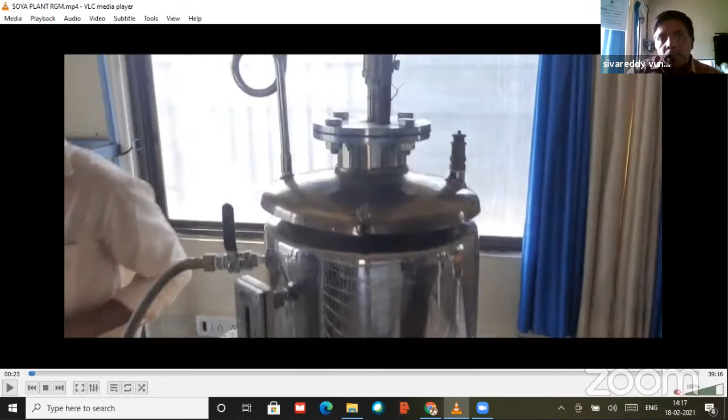After soaking, we clean the seed and separate the total skin. That skin we give as feed to the animals. The soaking is also done in the absence of oxygen - whatever oxygen is available in the water is all that's present.

General, not exposed to the general air - that is our target. At present, we don't have any vacuum chamber, so we are fully filling the chamber with water, keeping it in the absence of air while soaking. After soaking, we clean the seed and remove the skin.

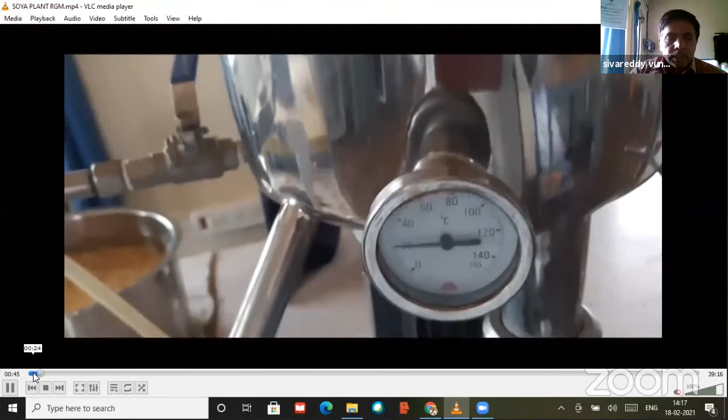Next, this is the boiler, a small boiler, let me show you. At present, the boiler is already at 1.5 bar pressure and steam is ready to supply. This boiler's capacity is 4 kgs per hour steam generation, which is more than sufficient for our batch.

This is the grinder cum cooking unit. Whatever seed we soaked, we first pour into the grinder. You can see this is the grinder unit. About 90% of the skin is removed here.

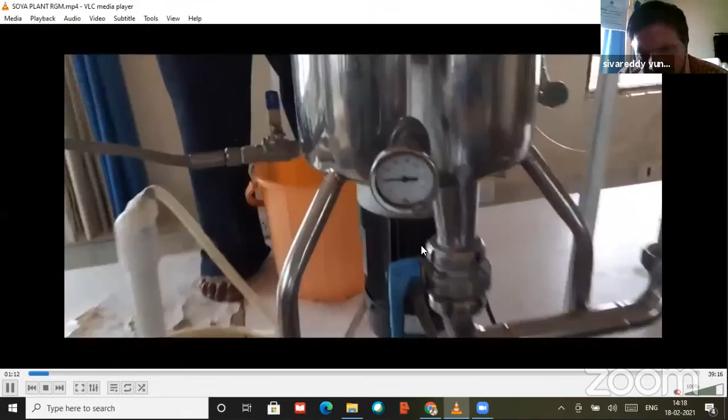In the grinder, at present the temperature is ambient only, around 20 degrees. The pressure is also normal, zero pressure - meaning ambient pressure only, with no pressure rise.

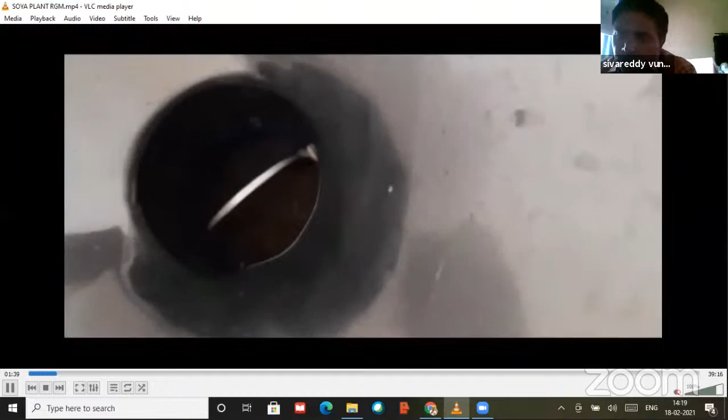I think 12 liters of water we are adding per batch. Each batch contains 2 kgs of seed. For that, we add 12 liters of water after soaking the seed. The seed will absorb 4 to 5 liters of water during the entire night's soaking. Then we close the pouring valve.

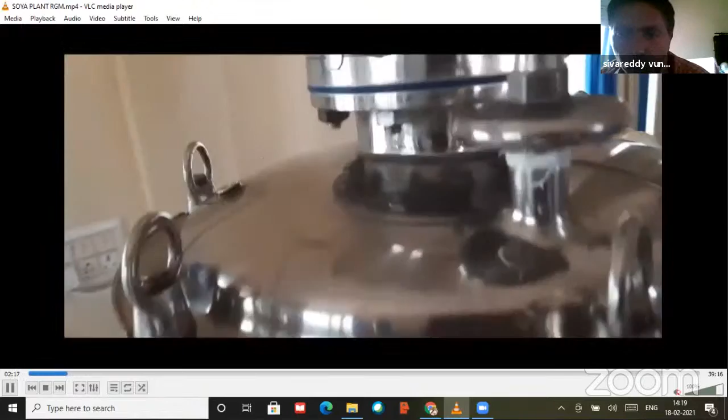Now we have started supplying steam. Why? Because in this grinder we are doing cooking and grinding simultaneously. Cooking happens up to 1.5 bar pressure and 110 degrees temperature. Grinding generally takes 5 to 6 minutes depending on the soaking of the seed, but effective soaking of the seed takes only 3 to 4 minutes.

See, from the boiler now - it's generally gas fired only. This is a small vessel, you can see.

Now, once we opened the valve, earlier there was 1.5 bar pressure. Now it's reduced to 1 bar because our helper stopped the gas supply. Because of that, whatever steam was generated went into the grinder, so pressure drop takes place in the boiler.

Again, we are giving fire, so the boiler pressure will increase. Generally, we maintain boiler pressure at 1.5 to 2 bar, and grinder pressure at 1 to 1.5 bar. Then only supply of steam from the boiler to the grinder will take place - otherwise steam from the grinder will enter into the boiler.

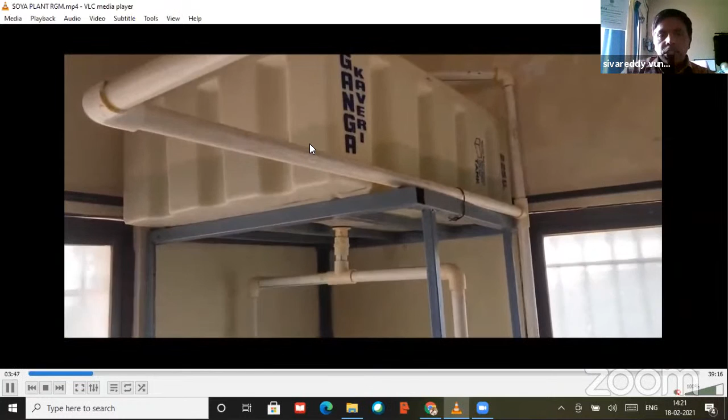We are maintaining it. This is the RO water collection tank only. Why? Because we have not placed an RO processing plant here. The RO processing plant for the institute is one centralized processing plant with 2000 liters per hour capacity. From there we directly get the RO water.

Because if we use RO water, the softness of the milk will increase. Otherwise the milk remains in a hard condition. This is a plant - it's our institute.

Why is my building away from our regular class activity work? Because we are doing processing work and some water smells come out, so it's not acceptable within the education institute. That's why a separate building is available in our institute - the R&D building.

This is the boiler. Now they provided fire. Let's see. This is the water level meter - checking how much water is there.

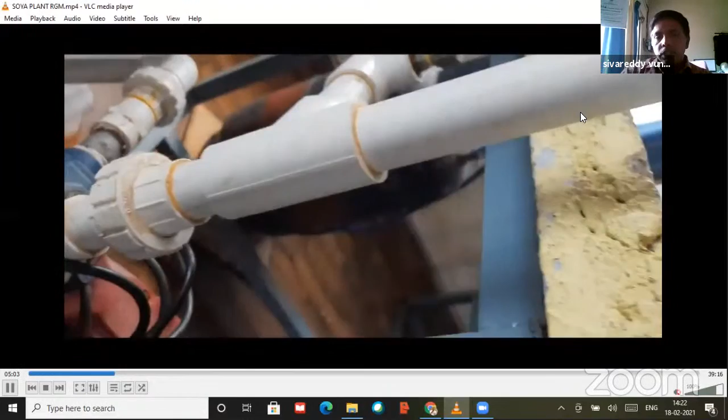Through a pump only, we supply this RO water into the boiler. If the water is reducing, we supply RO water through the circulating pump.

Now you see the pressure - earlier it was 1 bar. After giving fire, the pressure is rising. After reaching 1.5 bar pressure, we again start supplying steam to the grinder.

Yes, it has crossed 1.5 bar. It is reaching around 2 bar pressure.

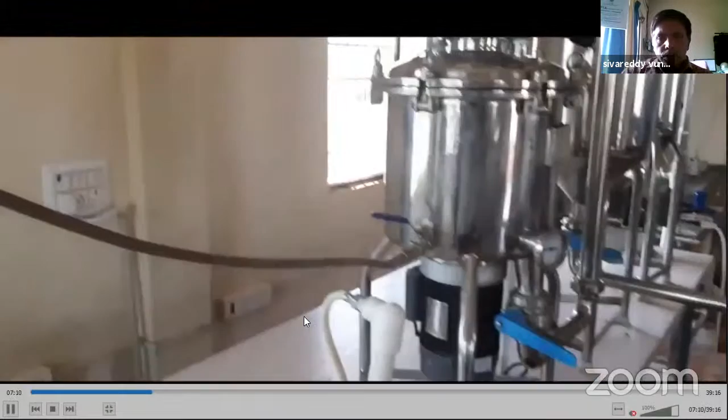Now the valve is slightly opened. You can see temperatures have now started rising - earlier it was 20 degrees. The pressure is at normal only. And we started the grinder.

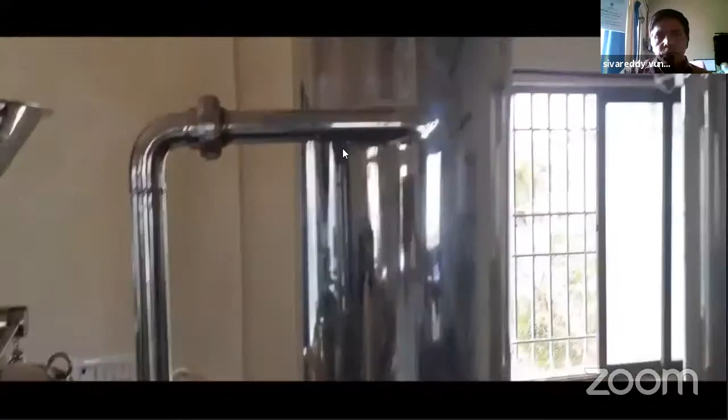This is the grinding unit. Carbon blades are used in this grinder. After this is a vacuum chamber, a suction chamber - there are two suction chambers.

Whatever cooked soya seed paste is there, we directly suck it into the second chamber. We placed two suction chambers because if something gets missed, it will not enter into the vacuum pump - one more suction chamber is connected after that. For this suction chamber, we have connected one vacuum pump.

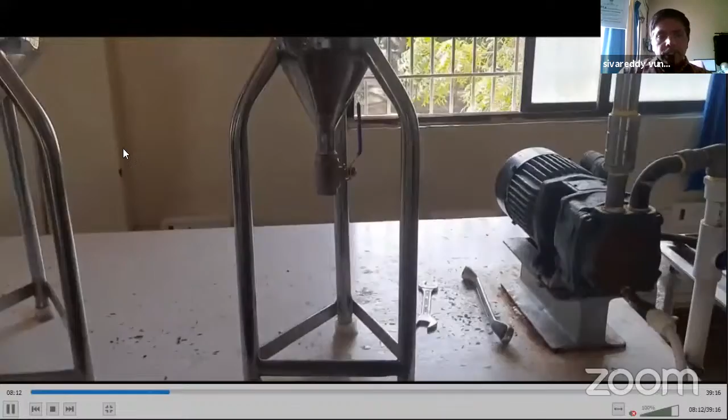By this vacuum suction operation, the main advantage is that we are sucking out water while cooking and boiling. Waterness is the major drawback of soya milk, so we are capable of eliminating this waterness.

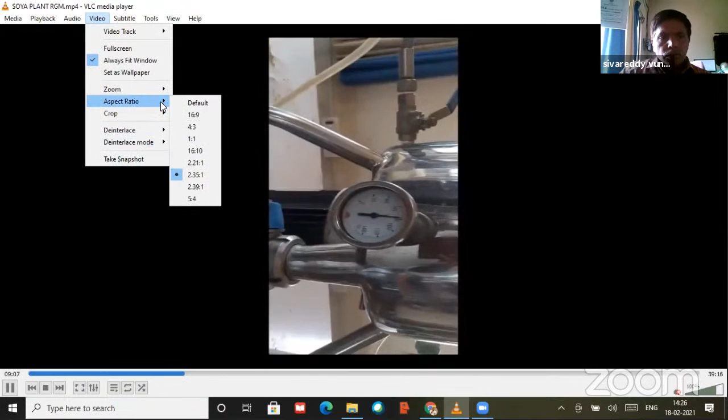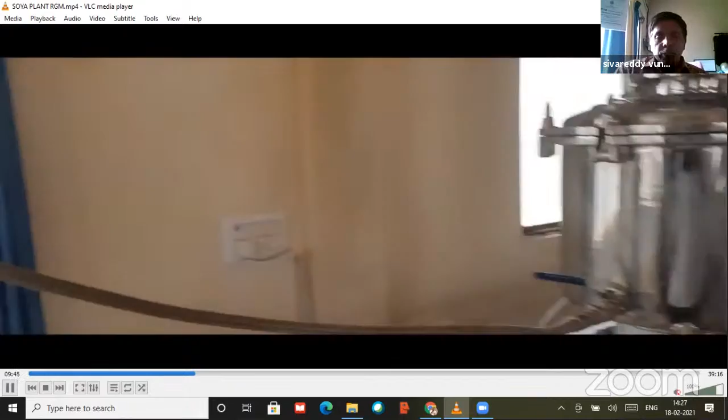Yes, you see the pressure is around 2 bar. So I want to remove the water after cooking time. More by steaming operation, more water is coming. That water, first initially, we are sucking by the vacuum pump. Entire water we are sucking by vacuum pump. That water is absorbed by the vacuum pump circulating water. So by the suction we get two advantages.

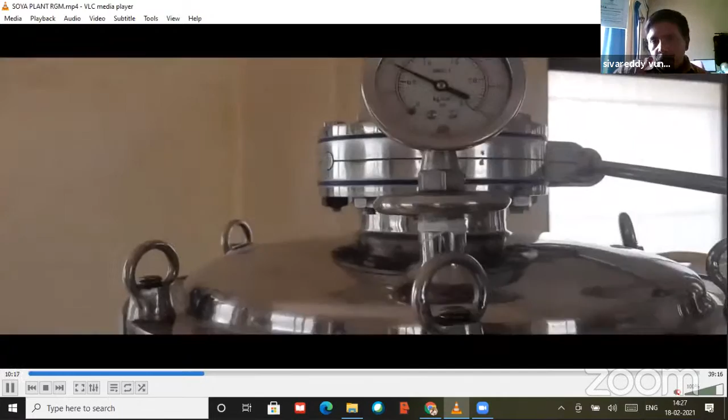One is from the grinder, we don't want to open the grinder. Entire paste, whatever the soya paste is there, total liquid we can suck to the second chamber, the preparation chamber. One advantage is no manual intervention. Second advantage, we are capable to suck the water also. 90% of water will be absorbed by the vacuum suction. That's why we gave two chambers.

At the time of suction, some liquid separately is coming, meaning it will enter into the second chamber also, because our vacuum pump capacity is 1 HP. Generally that is sufficient for 4 kg loading capacity, but at present we are doing only 2 kg loading capacity per batch. For that only, we connected the second chamber also. So by the suction operation, we are removing the water.

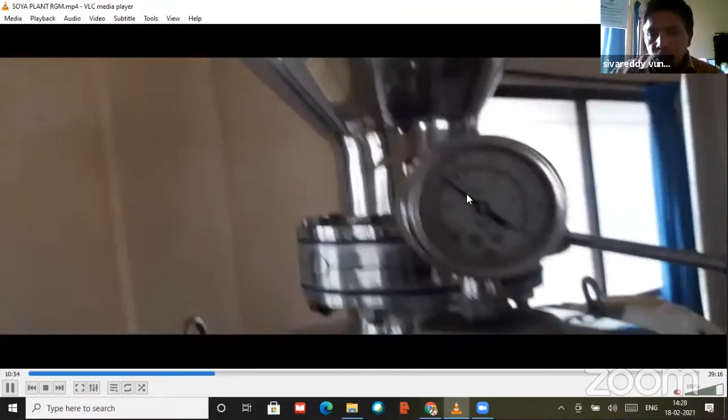That is the main advantage. You can see now in the grinding chamber, the pressure is rising to nearer 1 bar. Earlier it was in zero condition. Now it is coming to nearer 1 to 1.5 bar, and temperature 110 degrees. Up to 110 degrees we are cooking the soya seed. Now you see the temperature also reached 100 degrees. But for this, it will take at least 20 to 30 minutes. For reducing the time, we merged all the cut videos.

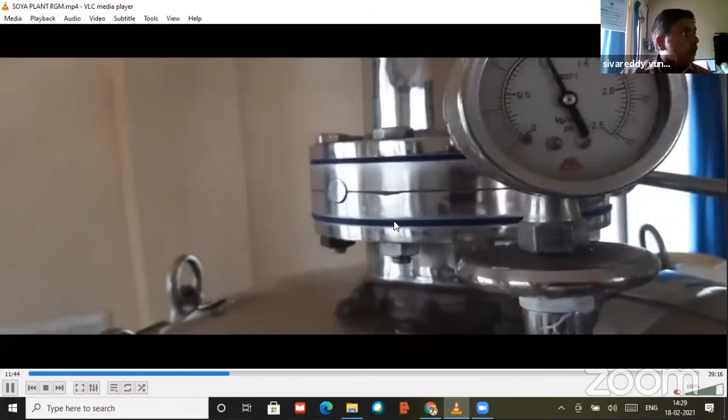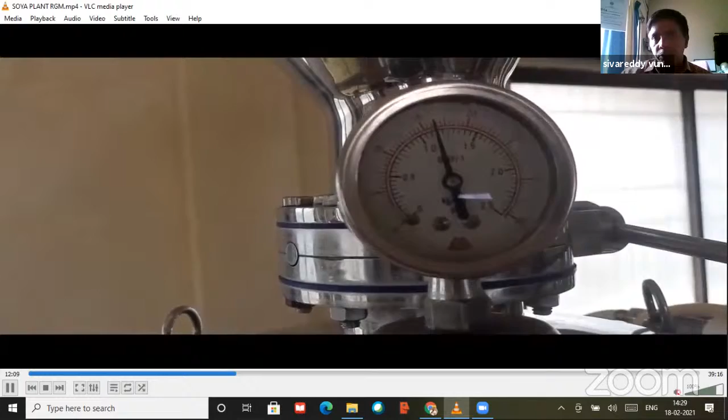Yes, almost it reached 110 degrees. If it crosses 120 degrees, again the spoilage of the flavor will take place. Less than 120 degrees only, cooking has to take place.

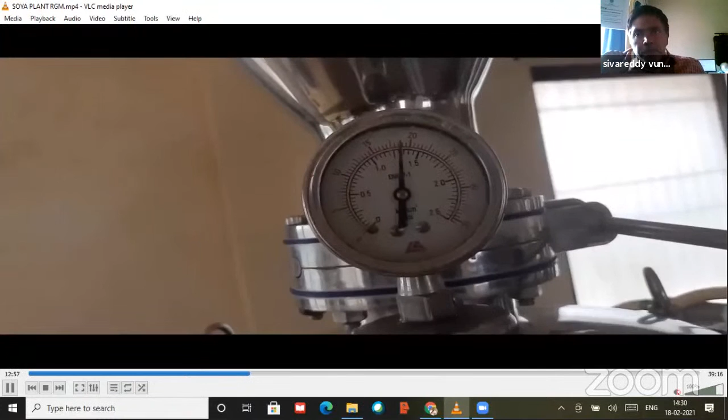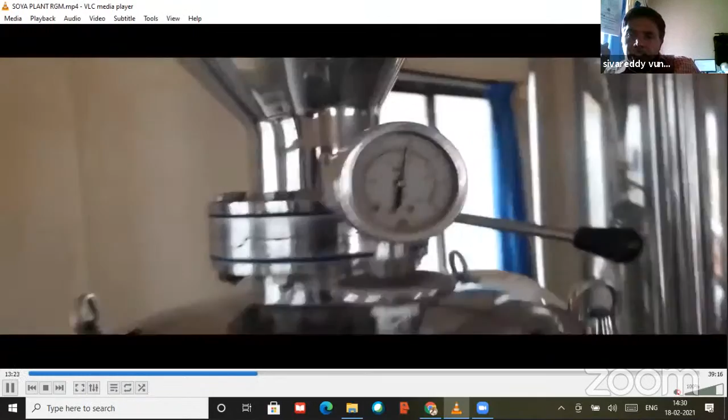And also that cooking is not by flame, that cooking is by steam. Earlier I mentioned 12 liters of water we are supplying and 4 kgs of steam. Total 16 kgs of liquid for 2 kgs of seed. 2 kgs of seed I am loading, meaning 16 kgs of liquid we are supplying. Finally we will get around 16 liters of milk, and 2 to 3 kgs of okara we will get. So for 2 kgs loaded, we get at least 14 kgs of milk. Per kg of seed we will get 7 kgs of soya milk.

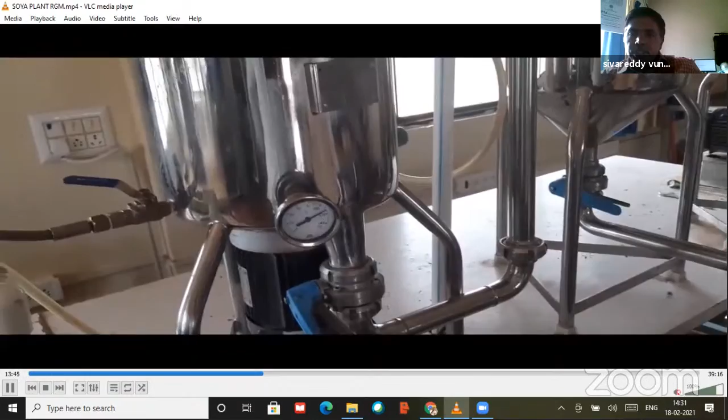You can see now, almost we are reaching 1.5 bar pressure. Yes, temperature also reached. If it crosses 120, it is dangerous. So we are stopping the steam supply.

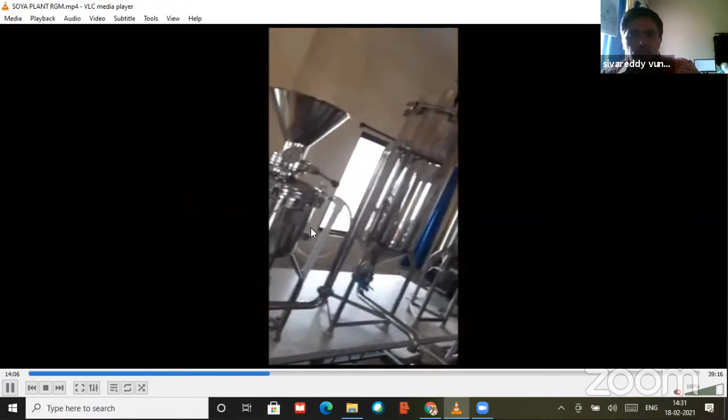This is the vacuum pressure gauge.

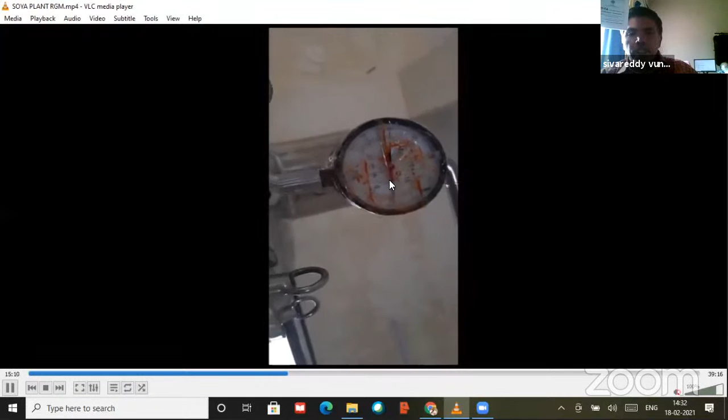Water supply to the vacuum pump. It will absorb the entire water and suck the soya paste to the collection tank. Two operations at a time we are doing. We are creating negative pressure by the vacuum pump. Once we open the valve, automatically the vessel will come to positive pressure. So we are not opening the entire valve from the grinder to the collection tank; according to pressure management we are doing it.

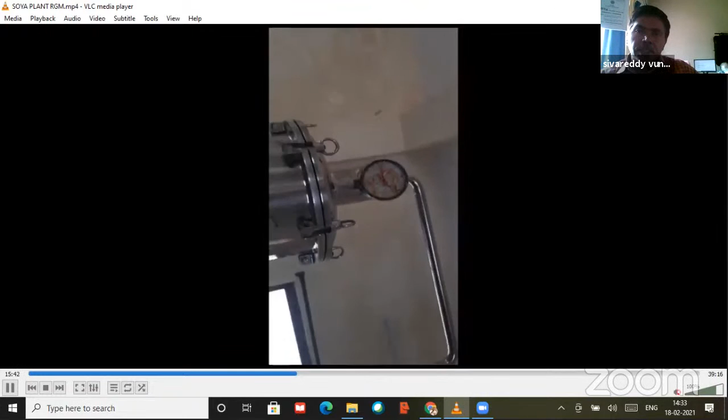For the entire operation, it will take a maximum of 2 minutes. Total suction of the soya paste: if it is fully grinded and fully cooked, within 1 minute we can suck it. Sometimes, in continuation batches, some seed is unable to grind, so holding of the seed takes place. It doesn't reach the carbon blades and grinding doesn't take place. At that time, suction is too difficult. Again we have to open the cooker and grinding unit and clean it, then supply the entire process again. It is a time-taking process. So with proper grinding we can eliminate wastage of time, and the number of batches per day can increase. Per hour, generally for cooking operation, 2 batches we can manage if we are not making the cake.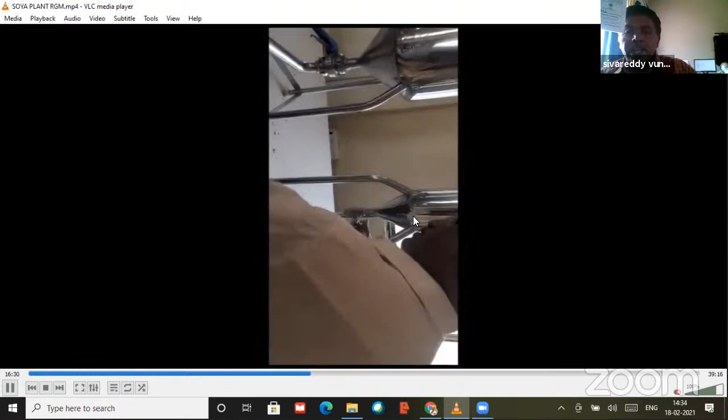This is the second suction tank; the soya milk enters it due to the high capacity of the vacuum pump. First we are emptying the second tank, but since maximum liquid only enters there, not solid, the majority of the solid accumulates in the primary tank only.

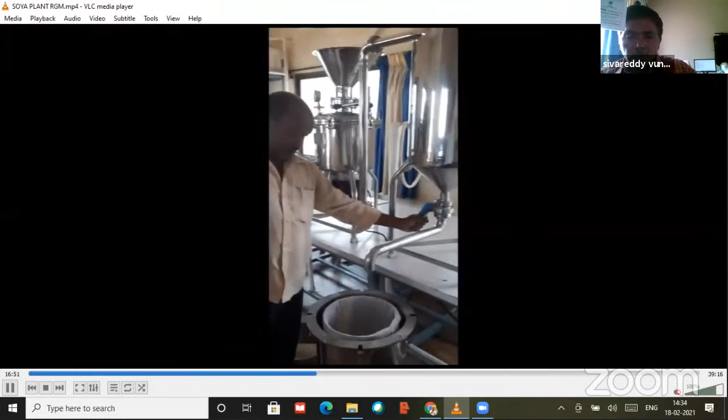This is the collection tank. See, next, yes, this is the cream of soya with okara. That jali (mesh) we are using for separation of okara and milk.

You see, now we are collecting milk directly. The entire okara will remain on the jali. I already mentioned the milk capacity: maximum 12 to 14 liters of milk we can get per batch.

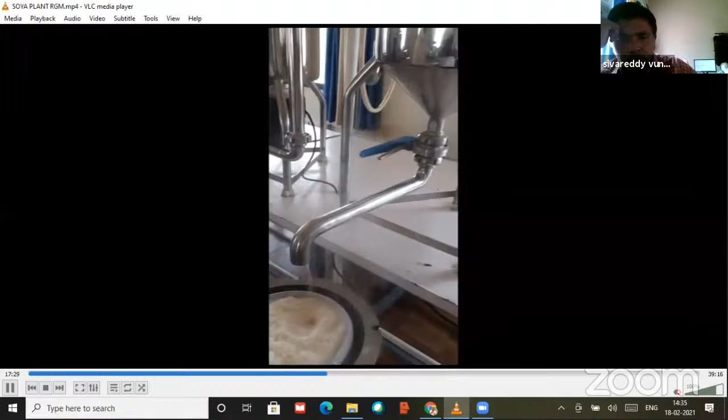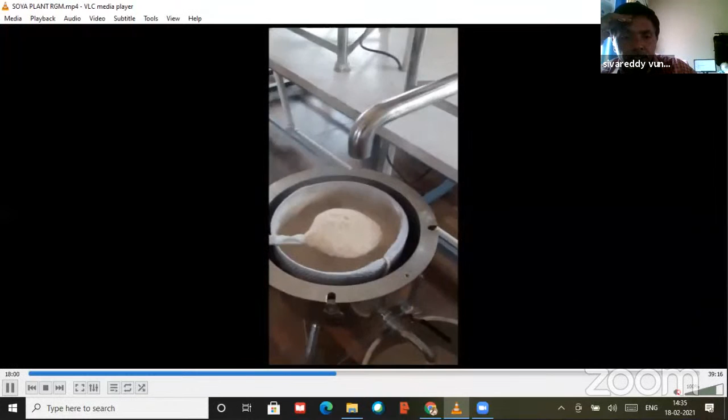Generally soya milk pH is 6.2 to 7. Our soya milk pH range is 7.28.

And water free. Just we are checking if any solid is stuck inside the cylinder or not. Nothing is there.

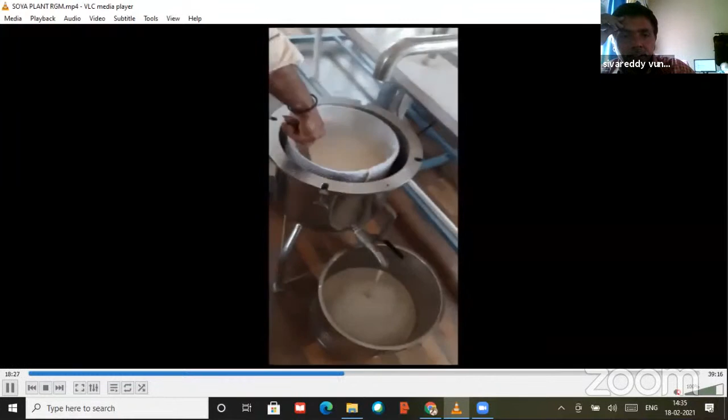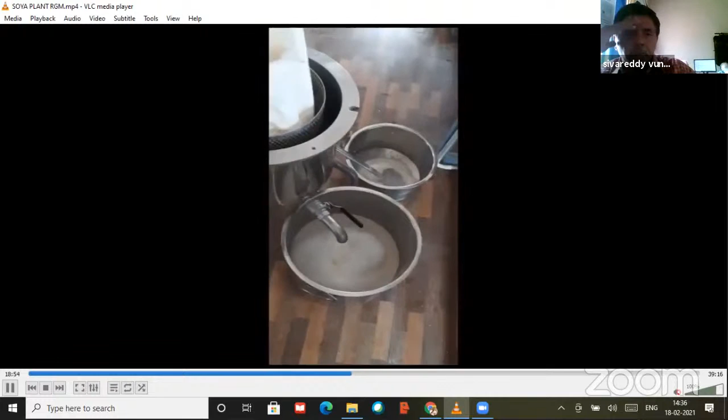So for this separation, generally we are using manual separation at present. If the batch capacity is around 50 liters, we can use a centrifuge. By centrifuge we can separate okara and liquid. But at present only 14 liters capacity, so centrifuge is not economical. So we are doing manual separation only from solid to liquid.

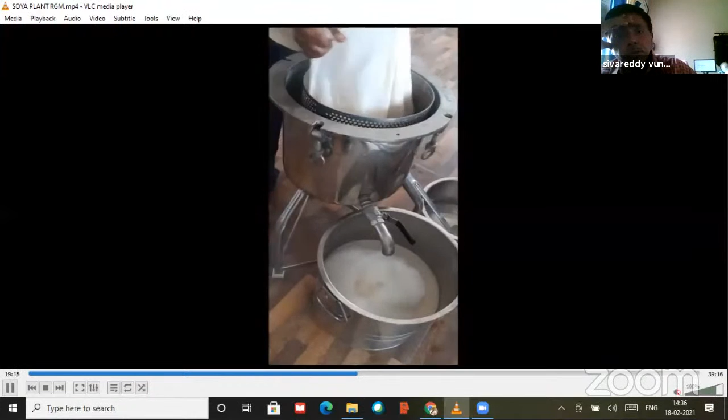The solid has high protein value. At present, some use that solid for chikkis and namkeens. At present we are not using the solid, but in our plant we feed the solid to the cows and buffaloes, and their milk productivity has increased compared to earlier.

At present, our seeding is 2 to 2.5 kg of solid we will get, because the total moisture we can't remove, that's why the weight will increase. Generally 2 kgs of seed we are taking, but 2.5 kgs of okara is coming because total moisture is not removed. That accumulated moisture weight also comes into the picture. Around 2.5 kgs of okara is coming.

So this is the pressing unit, all manual pressing. If it crosses 50 liters per batch, we can use a machine for that.

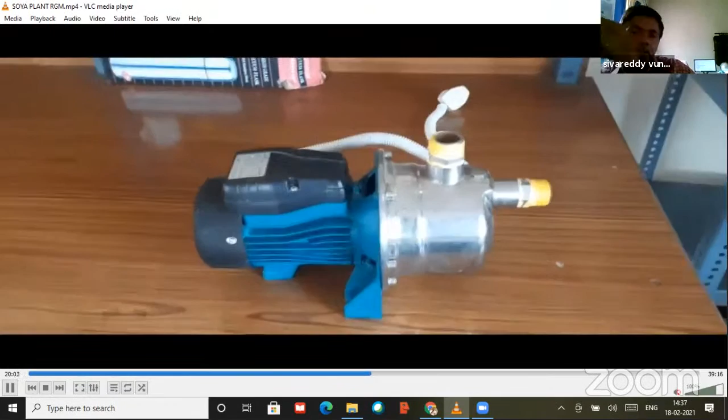This is a flavor mixing milk circulating pump. We are circulating the milk with adding flavors if required. Generally badam pista flavor taste is good compared to other flavors. We have all types of flavors with us: mango, kismis, and milk itself, 5 to 6 flavors of milk also available. These flavor suppliers are generally available in Bombay, Bangalore, and Delhi, 3 centers. Now whatever detergent is coming, we are removing that.

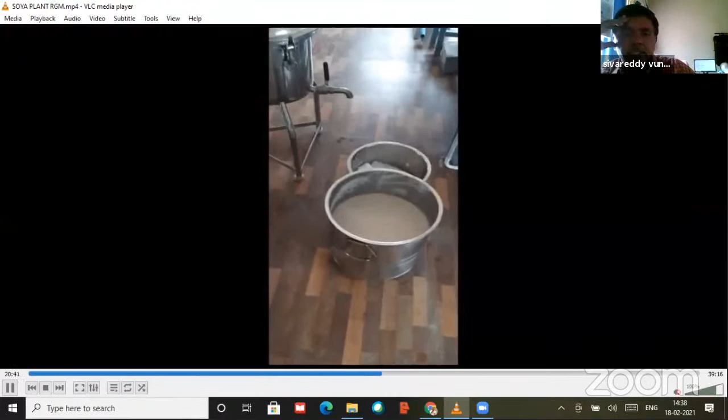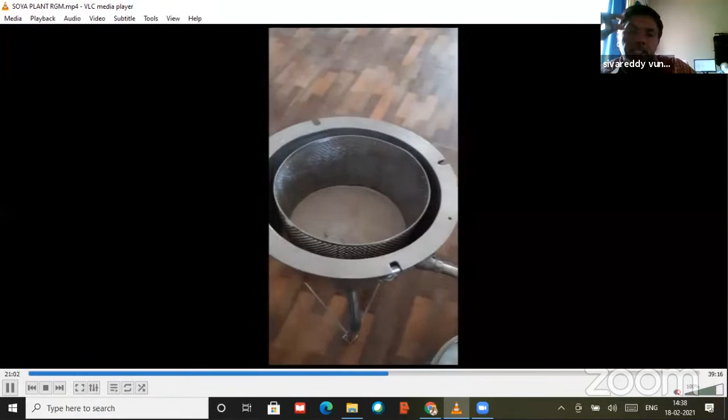So this is the milk preparation from the soya seed. Here, two things I am not disclosing. One, how the pH is enhanced. Second, the texture of milk - generally when we drink milk, after 10 or 20 minutes nothing is held on the tongue. But with soya milk, some taste is held on the tongue. We removed that also. These two are our own protocol.

This is the okara you can see, it's like a cake. With adding maida we can prepare biscuits, we can prepare cakes. But mostly at present all chikkis and namkeens are coming based on this powder only, with some maida or rice powder added.

Next, for breaking of the milk, generally citric acid is used by all, but using citric acid causes wastage of water, because citric acid has a sour taste. To remove that sour taste, I would need to dip the paneer in cold water for at least 3 to 4 batches. So as an energy alternative, I am not ready to accept that.

This is the milk, generally we are just taking any batch to see what the condition is. Now we are adding calcium lactate. At 80 degrees temperature, cracking the milk gives us paneer. At 35 degrees temperature, cracking the milk gives cheese. Now we are making paneer, not cheese.

Just whatever milk I removed, I poured that milk too. Generally we take some milk and prepare coffee and such, but today we have not planned that, that's why the remaining milk also we poured into the cracking tank only. So now the milk is cracked, you can see water and paneer is separated. Just our technician will visualize it.

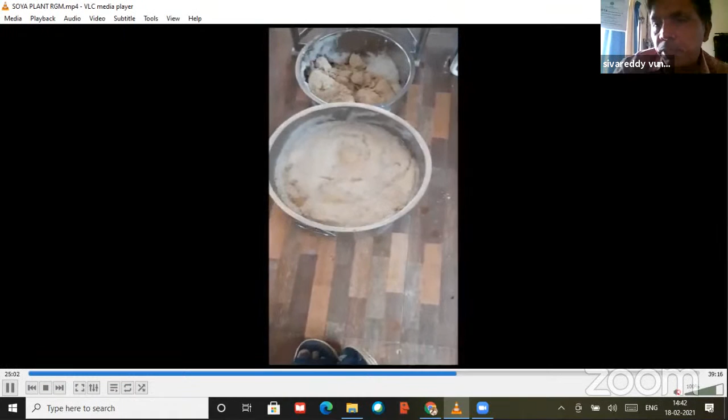Calcium lactate suppliers in Hyderabad are better compared to Madhya Pradesh. We procured from both parties, but the Hyderabad party's calcium lactate is good because it's in powder state and mixes easily with liquid. The Madhya Pradesh supply has a rough nature, it doesn't mix well with water, and some of the mass is wasted.

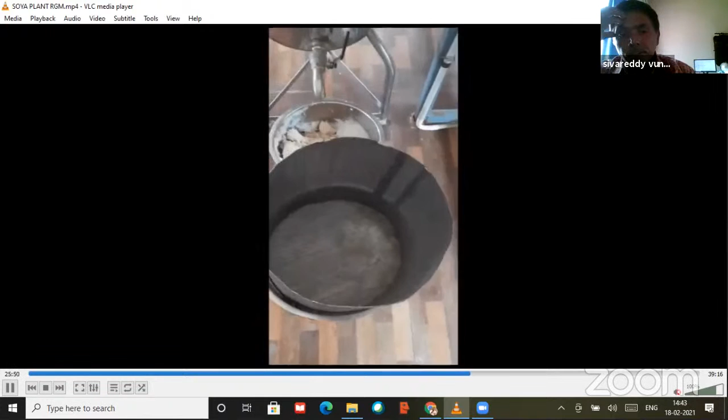So total cracking is taken, the water is separated and the cake is separated. Now we are removing the water using one more jali we used - this is locally made only. According to our need, we prepared small equipment ourselves. I am placing that one now. The total liquid will come to the top side and the cake will settle at the bottom.

This water, at present, we are generally wasting, but this water is also good for animals. So in a full-fledged plant, this water and the okara byproduct can be fed per batch to one animal as free food. Their productivity will increase and the protein levels of the cow's milk will increase. At present, we are only wasting this water.

You can see the entire operation, I used only one supporting staff, not more than that, because manpower cost is the main expensive compared to other costs. Equipment can be purchased with a single investment, but operation cost is very important. For current operations, with one technician I am capable of producing the milk and paneer. For cleaning purposes, I am maintaining one aya. So with two manpower, we are capable of producing at least 15 liters per batch, meaning 30 liters per hour, 200 liters per day. Two manpower cost is added.

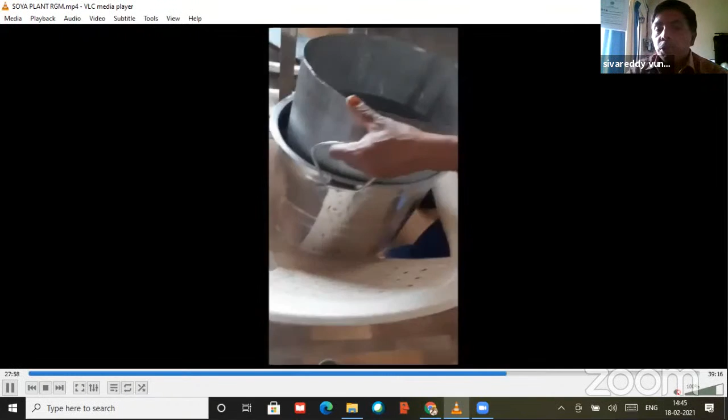Now you can see, you can visualize the cake.

This is the paneer tray. This is a cotton cloth available at any cotton shop, Khadi Bhandar. It is capable of holding temperatures around 90 to 100 degrees. The entire liquid will drain from this cloth, only the solid can be held.

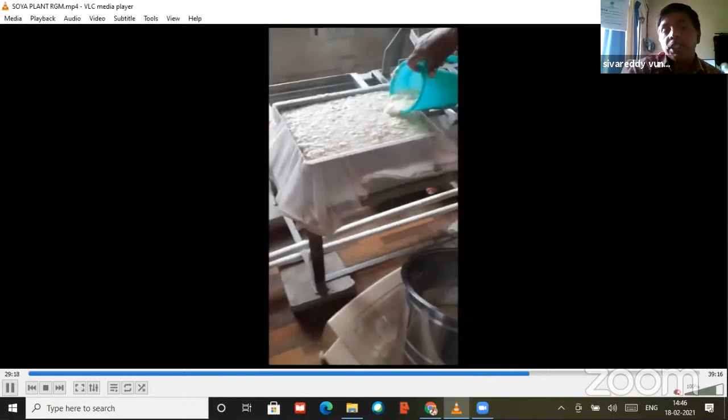You can see our supporting staff is not wearing any gloves. For hygienic purposes, if I were to show gloves at 90 degree temperature, it's not recommendable. You want to be healthy and clean yourself. In that high temperature, some other chemicals would be added to the paneer if we used any gloves. For low temperature operation, we can use the gloves. Once staff come inside the plant, I do not allow them outside until the entire operation is complete.

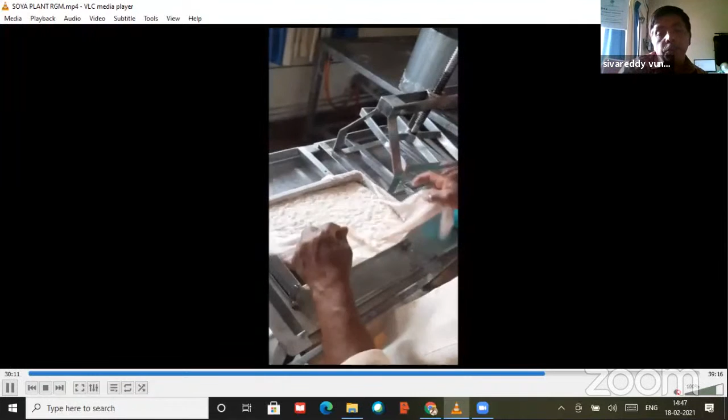So the remaining liquid, yes. This is also something we can introduce some automation for, but at small capacity, 3 kgs per batch only cake we are preparing, not cake, paneer - 2.5 kgs paneer we are getting, maximum 3. If proper pressing is not done, 3 kgs of paneer will come. So for this 3 kgs we can't make automation.

Also our main target is milk only. For your purpose only, I am also visualizing paneer, because milk demand is more.

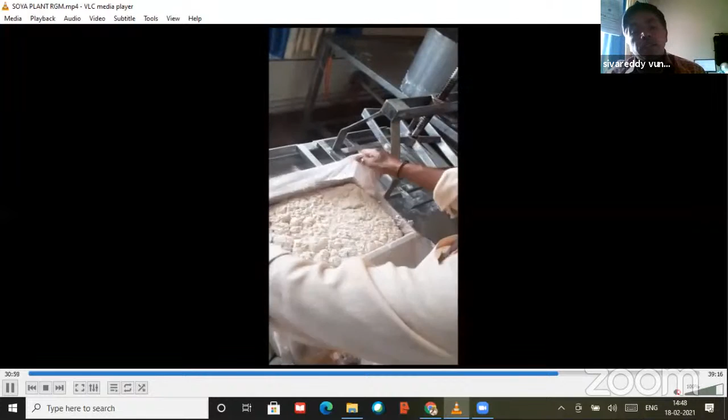This soya milk, by steam coffee, not general coffee making - by steaming operation you prepare the coffee, you will feel very good taste. And all flavored milk you can drink. So many proteins and vitamins are coming.

It is very good for pregnant ladies and especially for hair fall candidates. We can reduce the hair fall condition. All these testing reports are available in the market. We also tested our milk with Vimta Labs and SGS technologies.

So the importance of soya milk, every person already knows. This started before independence, but full-fledged commercialization didn't happen because at that time the demand for milk and supply were equal, or supply was more available compared to demand. At present, demand increases, supply decreases, so substitution of milk is required.

That substitution through quality milk - waterless, with attractive taste and high protein - we are capable of substituting. This means this is a very good business.

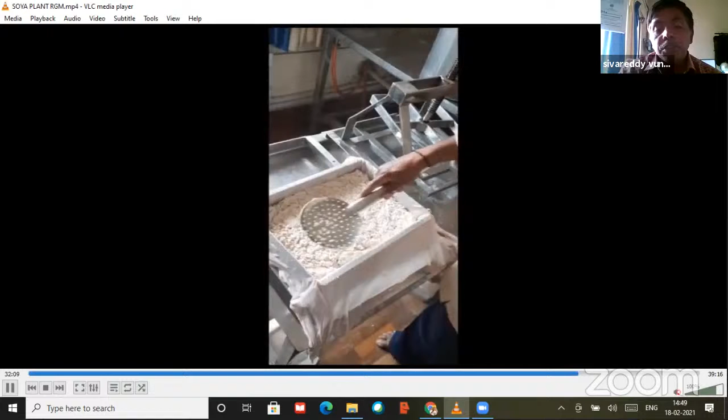This single plant runs per batch at 15 liters. If we are capable of running this plant, like in Nandyal town, running one plant per day selling 200 liters means you will get around 1 lakh to 1.5 lakh rupees income.

So this is the entrepreneurship activity. We are not job seekers, we are job creators. And also there is no competition. One student developed in one village, another student with a small plant can run in Vijayawada, or in any village or mandal headquarters. There is no competition.

Small clusters will give good taste and good maintenance also. There is no cold storage facilities and all. According to demand, we are doing.

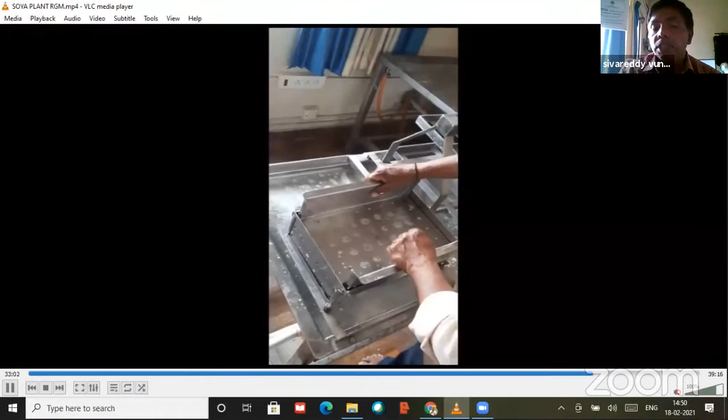Paneer demand is there. Night time, I'm running the plant for preparation of paneer, or early mornings I'm preparing milk like that. With this small plant only, I can earn more than 1.5 to 2 lakhs according to the marketing strategy.

While we are going for a job, maximum we will get 10,000 to 20,000 rupees at present condition. Better, this kind of activity will give self-respect also.

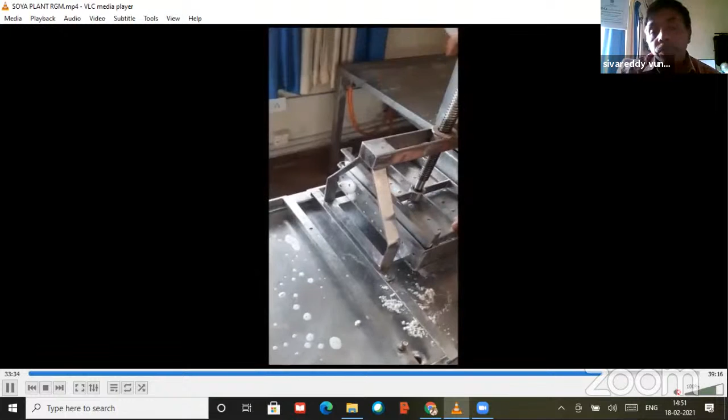Here we are doing the pressing operation. Generally how we are doing is that the person is tightening the threads. Where hardness is coming, we are stopping, and we keep the load like that only. After some time, again some gap will come, then gently we are rotating the load.

No force, by gentle operation we are removing the moisture, the liquids.

Just after removing, it will take at least half an hour time. We just clubbed the videos, that's why immediately it is completed.

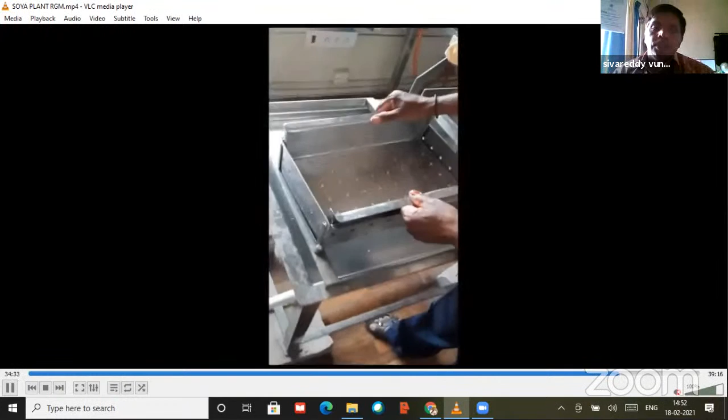Generally, buffalo milk paneer is around 350 rupees. Cow milk paneer around 250. Soya paneer less than 200, we can sell. We will get the profits.

So 2 kgs of seed, we are capable to produce 2.5 kgs of the paneer.

Actually, for that removal, generally we are pouring some cold water, but our technician is directly removing the cloth. Sometimes it will not come. So for better operation, you pour some cold water, easily we can remove the cloth.

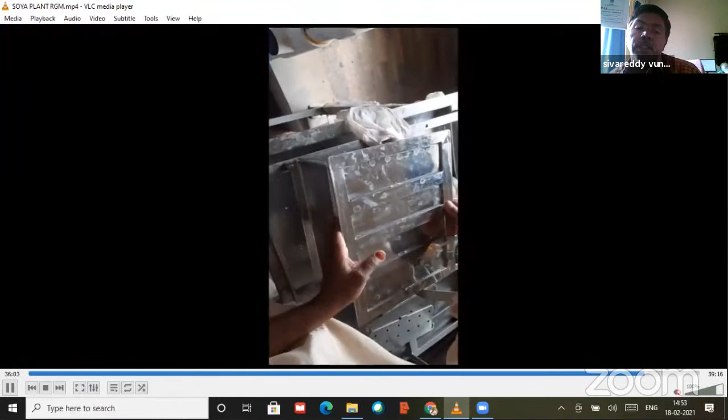If the camera is there, they will feel some tense mode. There are these two staff only with me.

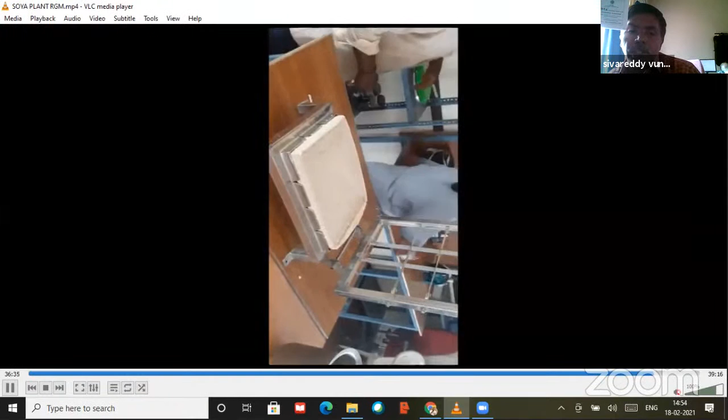We are removing this unwanted exposure, because one cake generally comes to 250 grams. This unwanted exposure, they may feel it is not good like that.

Now we are making pieces. Each piece contains around 250 grams. We can't give exactly, sometimes it is more, sometimes less, but 250 grams is the common weight. So there is a single piece.

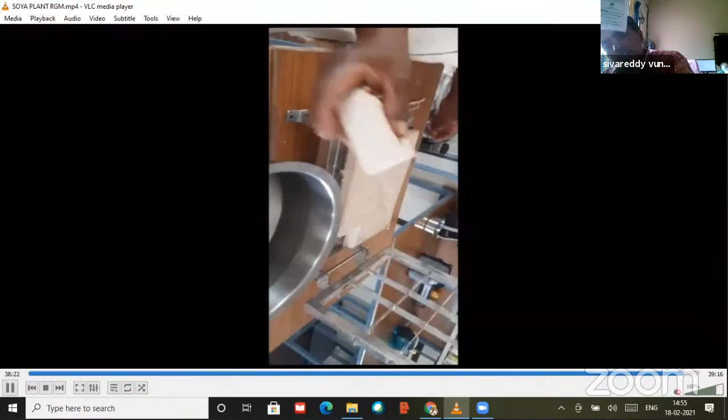The maximum life is 4 weeks after manufacturing, after producing the paneer. Within 4 weeks, we have to consume it. For storage, a general refrigerator is more than sufficient; we don't want to place it in a deep freezer.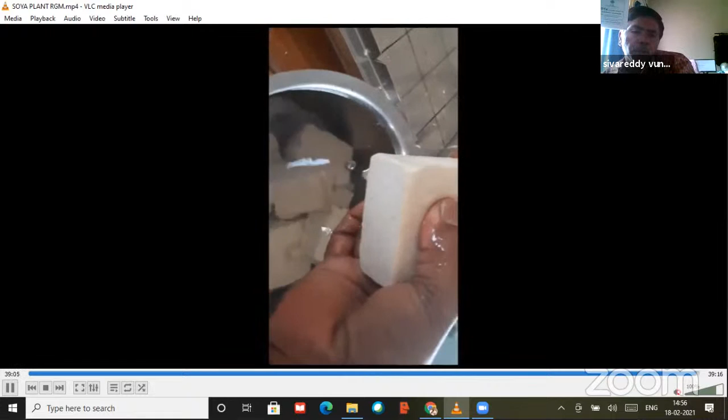You can see how smooth it is, equivalent to the buffalo paneer. Thank you.

I think you people enjoyed the visit of the plant.

If any time an offline FDP is there, we also give one day training on how to prepare. At that time you can see our protocols also, what we are adding to control the increase in calcium content and increase milk productivity and structure.

These are all trade secrets of the RGMCT, not Sivareddy.

This one we established at

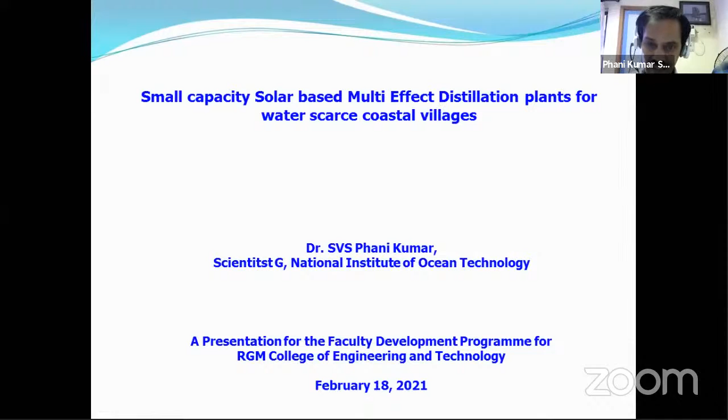Okay sir, this is the topic of my talk: small capacity solar-based multi-effect distillation plants for water-scarce coastal villages. As Sivareddy sir was saying, this is part of the work that we do at NIOT. So I will go into the topic straight away.

This is the outline of my talk. I will briefly introduce the topic, then talk about solar energy in India, solar collectors and their types, multi-effect distillation, the various steps involved in the distillation process, and also the solar-based MED plant that we installed in Kanyakumari, and then what work we can do in this area. There was also a request to touch upon tidal energy, so I'll briefly cover tidal energy details that NIOT is involved in, and also where tidal energy is available around India. This is the outline of my talk. As I indicated earlier, if you have any doubts, please feel free to indicate, so that with doubts I can explain more.

Okay, I will get into the topic. Solar based desalination is the topic that we are dealing with. Actually, when we are living by the side of the sea, in most instances water should not be an issue. But as the saying goes, water, water everywhere, but not a drop to drink. Sometimes it is possible that because of land contamination, the land water may not be potable. So even though the area is coastal, we may still end up needing water. This technology that we are dealing with gives potable water in small capacity using solar energy to remote villages. By that I mean small capacity plants.

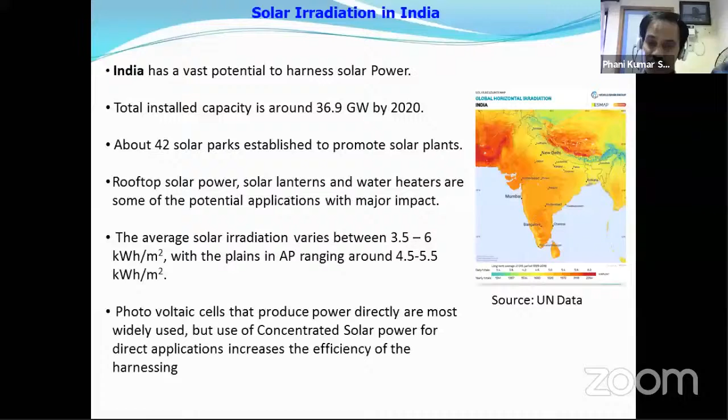Coming to solar energy within India, India receives solar energy in the range of 3.5 to 6 kilowatt hours per meter square. When we look at various regions of interior Andhra, where we are right now, we may be talking about somewhere between 4.5 to 5.5 kilowatt hours per meter square. Thus India has vast potential to harness solar power. At present, the total installed capacity in India is around 36.9 gigawatts, and around 42 solar parks were established to promote solar plants. Also, rooftop solar power, solar lanterns, and water heaters are some of the potential applications for major impact. When we say solar power, photovoltaic cells that produce power directly are the applications that are mostly used, but at present concentrated solar power is also being used in various places.

When we say solar collectors, there are various types: flat plate collectors, evacuated tube solar collectors, parabolic troughs, point focus collectors, and solar towers. All of these are solar collectors that collect solar energy and concentrate it on a medium like fresh water or a low boiling fluid, heating that fluid so the heat can be utilized in various areas.

The solar collectors we're talking about may vary vastly in terms of efficiency. Flat plate collectors can give you water up to 50 to 60 degrees centigrade. Evacuated tube collectors can give up to 60 to 80 degrees centigrade. Linear and parabolic troughs can give you water up to 120 degrees centigrade at 6 bar pressure.

There is also something called a solar tower, which follows the sun. Parabolic troughs can also follow the sun, tracking it throughout the day and concentrating the energy onto a central collector where the working fluid is heated. This heated working fluid can then be used for various applications.

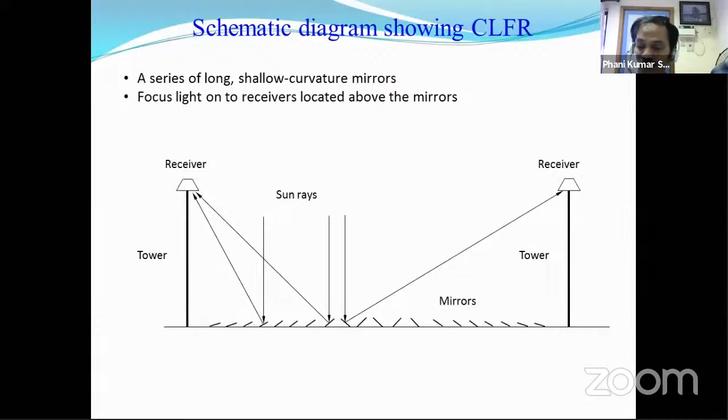Here we are still talking about linear, compact linear Fresnel reflectors, where sun rays fall on the reflector, and there is a central collector carrying the working fluid. All the reflectors are arranged locally so that they reflect onto the central member carrying the working fluid. When we call an object a reflector, what it does is concentrate the solar energy onto a point, like putting it under a microscope or lens, so that at that point the working fluid can be heated.

Depending on the efficiency of the concentration, the various classifications like flat plate, evacuated tube, and things like that will come about.

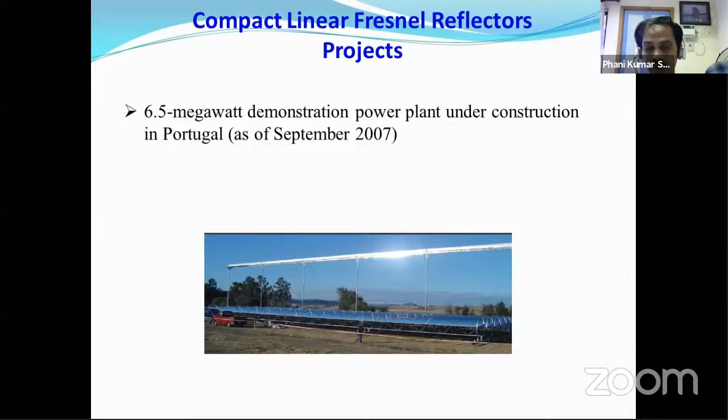Various applications have been envisaged using these solar collectors. People have used this application to generate power. Basically, we run a Rankine cycle using the heated working fluid so that the heat energy can be converted into electrical energy, and the entire thing will be running in a closed cycle.

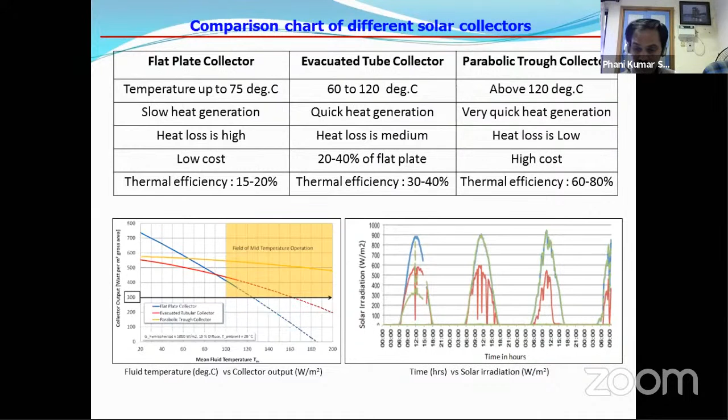That completes the section on available collectors. If you have any questions, please feel free to ask.

Let me go to desalination techniques. Basically, when we say desalination, we are converting seawater into fresh water. Various available techniques for desalination are distillation, vapor compression, reverse osmosis, and electrodialysis. Reverse osmosis and distillation are most widely used, where reverse osmosis you can see even in household applications.

Whereas in the Middle East, where oil is cheap, people use petrol to heat the water up to 6 bar pressure, that is 120 degrees, and then use multi-effect desalination, which I'll be explaining shortly, to convert that vapor into fresh water. That is thermal desalination, where we are boiling water, getting the vapor, and then using cold water to condense the vapor so that we can get fresh drinking water.

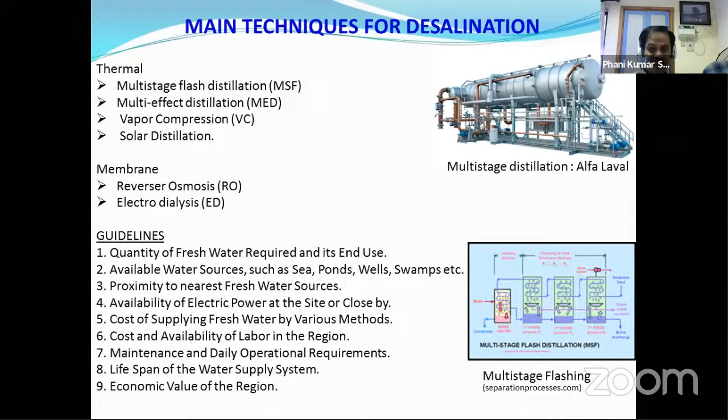Coming to multi-effect distillation: multi-effect distillation has effects where feed water is sprayed on the tubes carrying vapor from the previous stage. That means feed water vaporizes on the outside of the tube, whereas in this stage I got vapor by evaporating. The vapor will go to the next stage into the tube, so that when the feed water evaporates in that stage, using that heat...

During the process, vapor in the tube condenses and produces fresh water. Each stage essentially reuses energy from the previous stage, and successively lower temperatures and pressures are obtained after each stage. So from a top temperature of let's say 120 degrees or 60 to 80 degrees, each stage cools the water by 5 to 7 degrees, coming to a bottom temperature of around 50 degrees. Usually in thermal desalination, the last stage is a conventional stage where vapor is on one side and cold water on the other, and it condenses using the cold water.

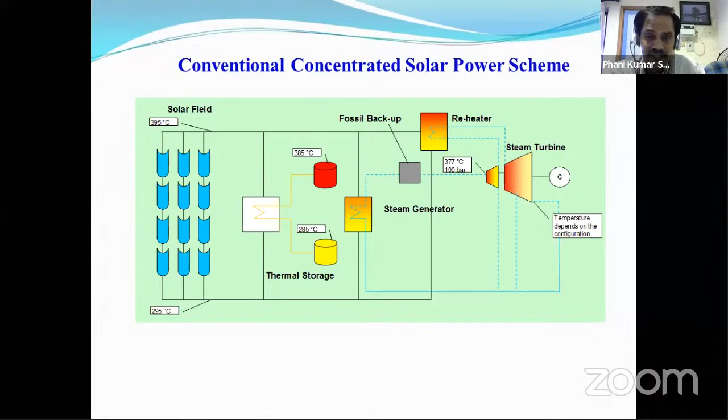We collect the steam in a central tank, and from the tank we pass the steam to a steam turbine to extract energy, then pass the low temperature steam back to the collectors in the cycle for heating. But the limitation of this scheme is efficiency. Maximum energy I can extract from the system is governed by Carnot efficiency - the delta T for the steam through the turbine compared to the bottom temperature in Kelvin, which is the maximum efficiency I can achieve in the system.

What we do differently with multi-effect desalination is, instead of converting it to energy and using the electricity for a different purpose, we directly take it to an application like heating water and using that heated water to desalinate. We are cutting down on one intermediate stage, so efficiency will be increasing in the process.

What we do is use concentrated solar power to heat water either to 6 bar pressure or to 60 to 80 degrees centigrade. Then at each stage we condense the water on one side and generate fresh vapor on the other side so that we can get the fresh vapor.

So this is a system that we installed in Kanyakumari. Basically, it has two components. One is the multi-effect desalination system that I was talking about.

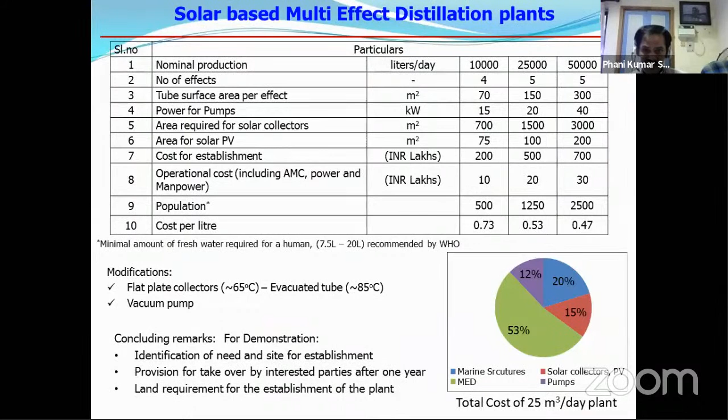So that brings us to the end of this half of the talk. Coming back, this is the cost involved - I already touched on that.

Any questions up to this part?

If there are no questions, I will briefly touch on tidal energy.

When we are talking about tides, tides are a response of the ocean or water body to varying solar and lunar attractive forces due to rotation of Earth and Moon. The attraction force of sun and moon varies depending on where the sun and moon are, on the opposite side or right above our head, and accordingly the water body will be pulled towards the sun or moon depending on the time of day, and the level of the water body will vary.

Depending on the location, distance from the equator, and some other factors, tides can be diurnal, meaning a 24-hour period, semi-diurnal, meaning a 12-hour period, or mixed type, which is a mix of diurnal and semi-diurnal. Some regions witness very high tidal variations because of their location and various geological factors.

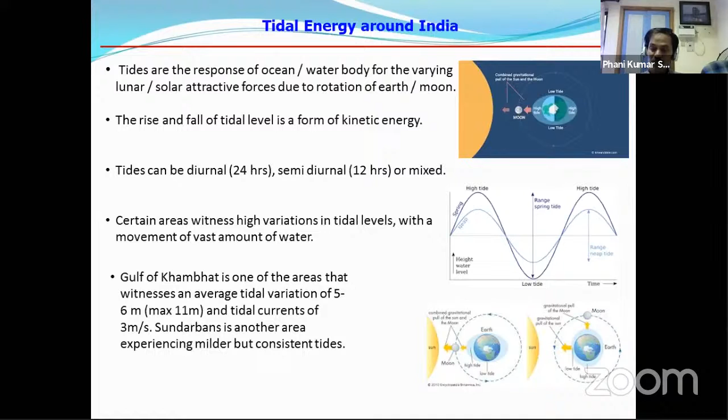That is one of the minus points when we talk about tidal energy. But at the same time, imagine a region where, from Bhavnagar to the other side of the coast in the Gulf of Khambhat, we are talking around 15 to 50 or 60 kilometers across. That much area sees water level differences of around 6 meters in a 6 hour span, meaning a huge amount of water is coming and going. So naturally we can extract a lot of tidal energy in this region.

But as I was indicating, the difficulty is with the currents for extracting tidal energy. I need to install a tidal turbine there, fixed to the ground, and that also means...

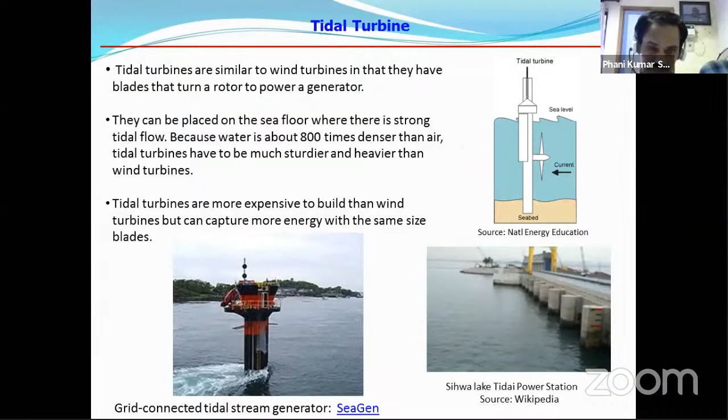We have done detailed bathymetric studies and mapped the entire floor of Gujarat, the Gulf of Khambhat area. To take care of the local loads and things like that, we had to design various instruments and employ various techniques so that we could get continuous readings. We were able to achieve that. It was a massive project involving various locations and a lot of people, and around 3 to 4 years of work. We were able to complete that part.

Right now the government is going forward in preparing the pre-project documents to invite global tenders. So we are in the process of getting involved in this part also, where we'll be advising on various aspects like design and current and wave related information. We are involved in this area.